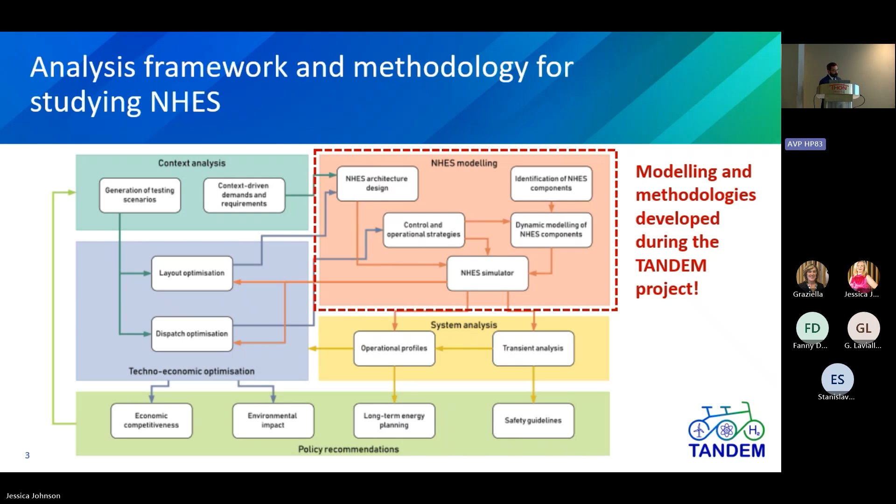This presentation will mainly focus on the modeling and methodologies that we have developed during the TANDEM project. So at the end of a project, it's a little bit sad because it's finished, 3 years of intense work, but I think that there is one very important question that we have to answer. And the question is, why is the world a better place after the TANDEM project, and specifically after the work package 2 activities? At the end of the day, we have found 3 answers to this question, and I will tackle the first one, and then there will be Guido and Torsten to tackle the second and the third one.

At the end of the day, we were able to develop an open source Modelica library. We have already mentioned this in Claire's presentation. So we have developed a modeling tool that is open source, so everybody can use and everybody can exploit the work that we have done. This library was aimed at simulating the more technical aspects of the behavior of power plants, of the different systems coupled within the nuclear hybrid energy system, obviously including the nuclear part. TANDEM was mainly focusing on light water SMRs, but not only, and also the other components that represent our integration, meaning hydrogen plant, desalination, thermal storage.

The second big outcome that we have achieved is that not only have we developed the bricks, the building blocks for developing a possible simulator for the hybrid energy system, but we have developed 2 hybrid system simulators. One for the first case, the district heating case, and the second one for the energy hub case, that have been developed for the techno-economic analysis and the safety analysis. And in the next presentation, you will see the application of these 2 simulators.

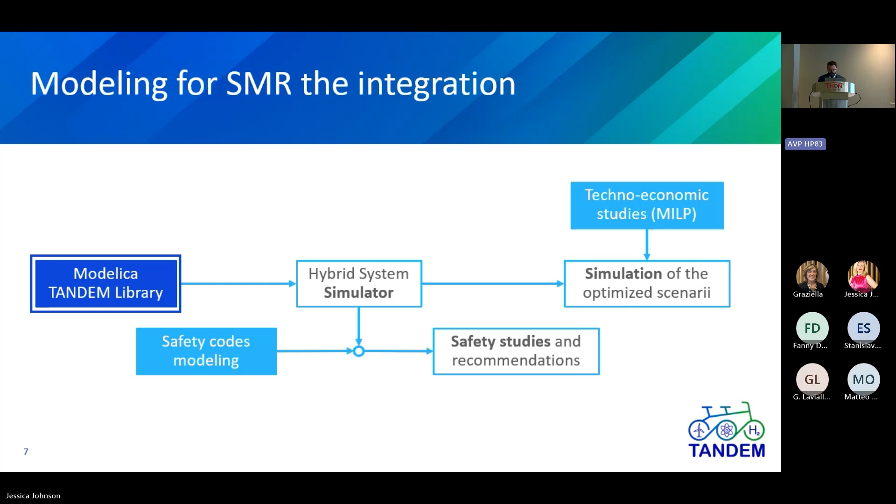The first step that we tackled for the TANDEM library was starting from the functional requirements that are asked for this kind of library. So we asked ourselves which are the key features that this library has to have, the must-haves for our modeling tool. And here you can see that we would like to have something that is able to have a dynamic response of our systems. One of the biggest challenges of a hybrid energy system is to coordinate the different inputs and outputs in terms of energy flows, so both electricity and thermal flows, in order to be able to exploit the best from our system.

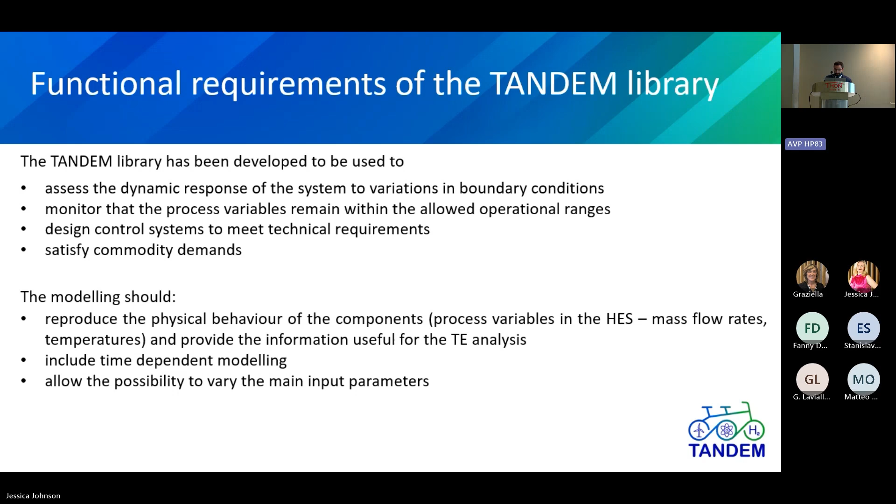Obviously, for a more technical part, we need to keep trace of the process variable during this variation. So at the end of the day, we come up with the Modelica library. Another important feature that we would like to keep is that a lot of partners in the TANDEM consortium had experience in Modelica. So we should not reinvent the wheel, but we decided to reuse some legacy libraries that have been already developed by the partners and share the library in a more general framework, the Modelica TANDEM library.

And on the other end, try to develop connectors that make it possible to use both the best from one library and the best of the other library. Here you can see the models that have been developed for the library. You can see the more nuclear part with the NSSS and the balance of plant, electrical grid, district heating, storage, renewable, desalination, and hydrogen production.

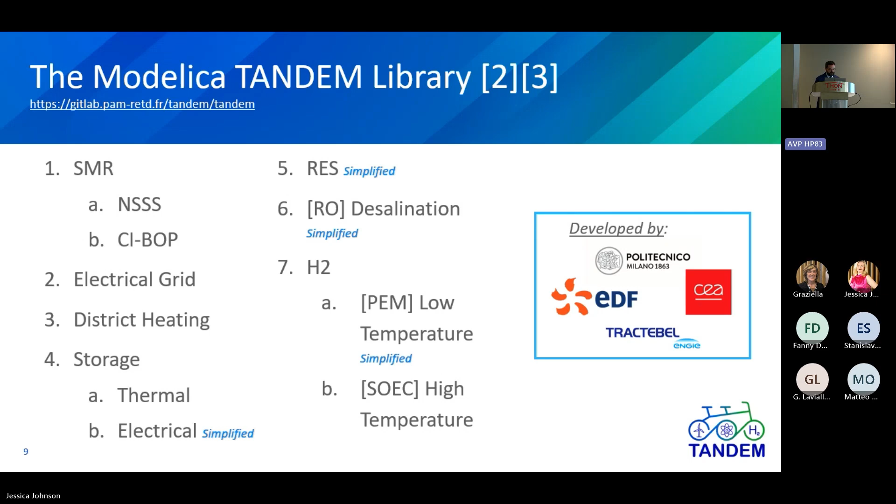Always in the first phase, we have decided which are the components for which we need a very detailed configuration. And here you can understand that the simplified keyword means that since there are some components that require just an electrical connection, we decided to simplify the modeling. And these are the supporting libraries, so the legacy libraries, and you can see that they are coming also from different

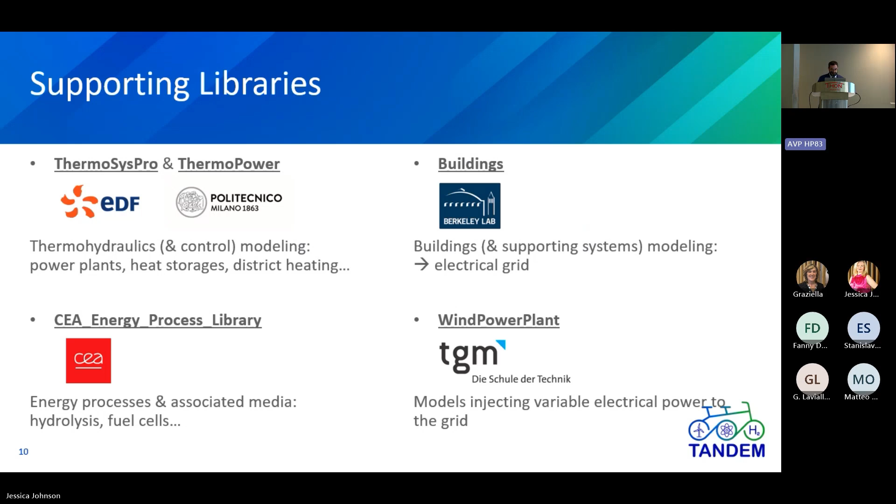partners. The other important message that we want to share with you is our general approach that we employed for the library. As I mentioned before, this is a general rule in modeling: try not to complicate the model of the components much more than it's needed. So that's why for the only electrically coupled components, we decided to keep simplified modeling strategies. As I mentioned before, different Modelica libraries have been used for the modeling.

And so we have developed ad hoc adapters in order to be able to, for example, take the model of the NSSS from one library and then couple it with the balance of plant from another library. And then we have considered mainly two coupling approaches: one thermal coupling, and the second one the fluid coupling, in which we can decide the degree, simplified or a more refined coupling between the two subsystems. Obviously, these apply for the strategy in which we decide to couple components coming from two different libraries.

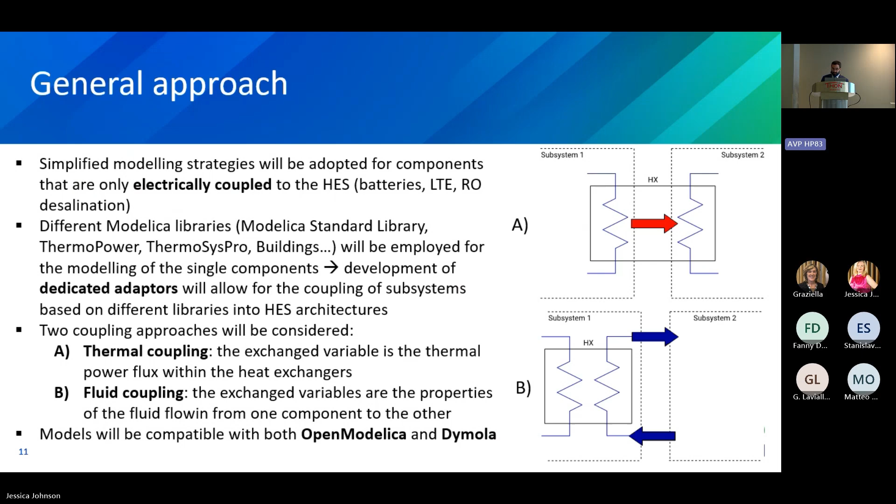Here you can see in a very brief way an example of the module. In this case, we take the data from the E-SMR, European SMR from the ELSMOR project, and we develop two models for the NSSS and three models for the balance of plant. This was mainly driven by the fact that in some cases you need different degrees in your model of the balance of plant. So one model is the so-called simplified one. The other one is more dedicated to transients in specific

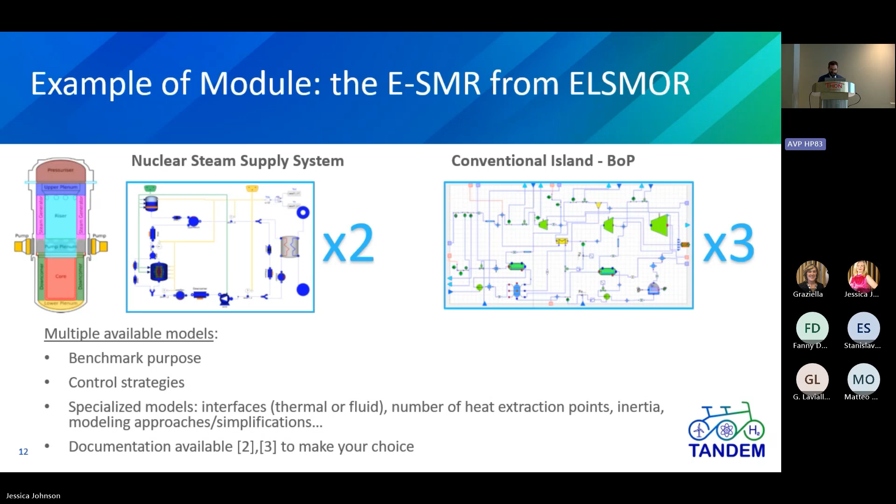situations. So the library is once again open source, freely available in the GitLab repository. You can find the link in the TANDEM website. As mentioned before, how can we use this library? You can develop your customizable simulator. You can assemble your own simulator with the available bricks. You can also develop your own bricks depending on the needs.

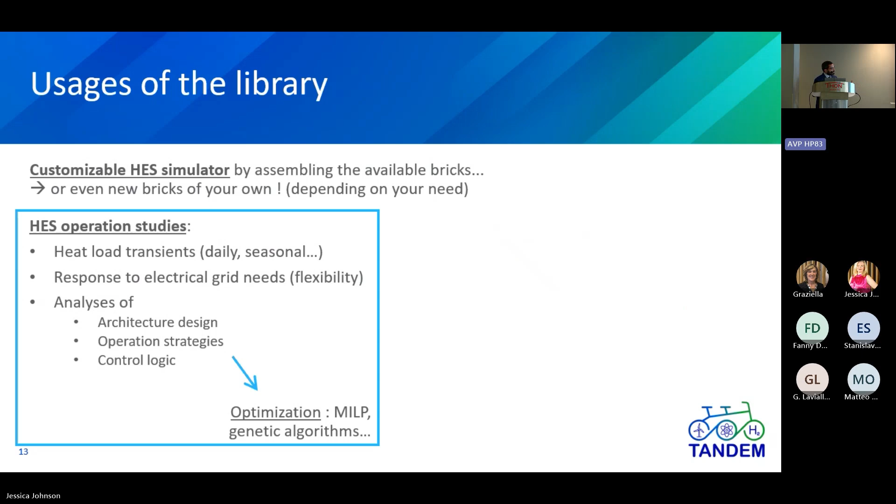And the two main applications: the first is to study the operational transients, like heat load transients. We want to study how the system responds to the daily or even the seasonal variation of the heat, the response to the electrical needs, and so on and so forth. And this is the application more related to the techno-economic analysis.

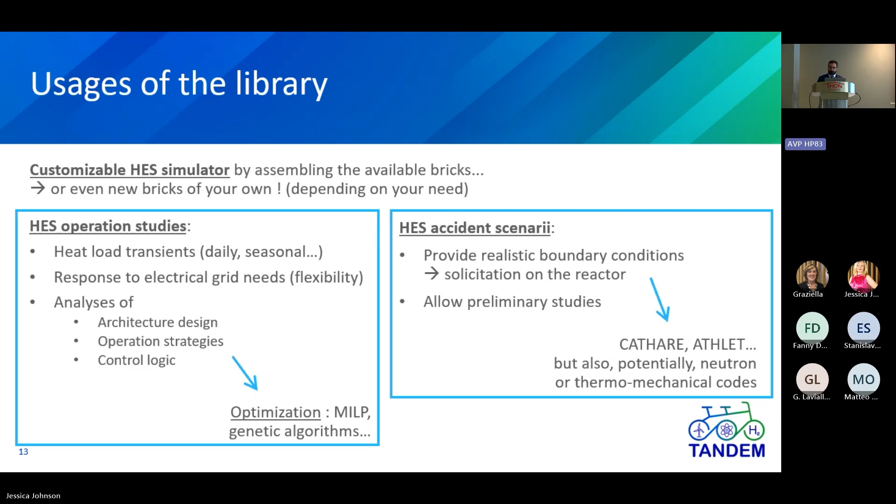The second one is the application for severe accidents. So try to really understand which is the difference, if any, the additional concern that we are introducing when the balance of plant is used also for cogeneration applications or in general polygeneration applications. So this is the very big first achievement that we have developed, the open source Modelica library. Now I give the floor to Guido for the second big outcome, which is the development of the two hybrid system simulators.

Yes, thank you. So with this slide, I just wanted to show a practical application of the library, which is the modeling of the two case studies that were introduced by Claire this morning. The first is the district heating case, for which we considered the district heating network in the Helsinki metropolitan area as a reference, which as of today is driven mainly by fossil fuels, and as part of the decarbonization strategies investigated by TANDEM, we considered the potential integration of a light water-cooled SMR to this grid.

And the second architecture is the one of the energy hub case, where we are talking mostly about an industrial district, where we have several electrical and thermal power sources that are strongly interconnected with each other and with different industrial processes, like hydrogen production, desalination, and so on, to provide commodities to different end user segments.

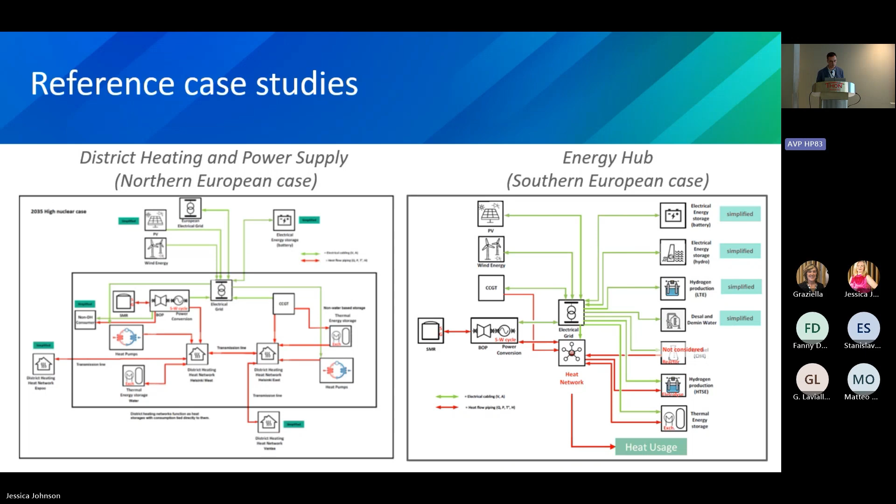Before diving into the modeling activities, we carried out an intermediate step, let's say, a preliminary investigation, to translate this more conceptual architecture into a more detailed plant layout, which you can see on the right-hand side of the slide. In particular, we tried to build and provide a representation of this district heating network in a more detailed manner, considering also heat exchangers, transmission lines, valving systems, pumps, and so on, to be able to translate it into the Modelica language and account for the dynamics and the phenomena occurring in the single components of this district heating network.

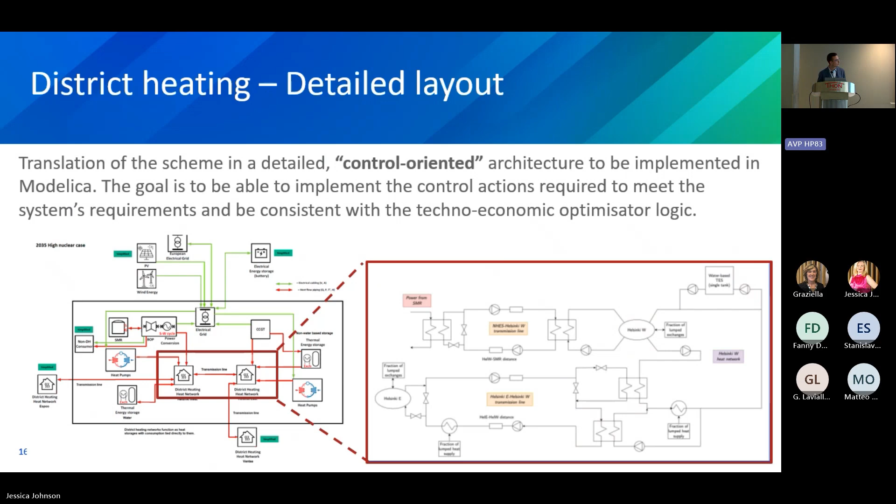So if we look at the simulator, this is the simulator resulting in the Modelica language. I think that also from this picture, you can really appreciate the advantages of using an object-oriented modeling language like Modelica, since it was possible to take the single bricks in the library and assemble them with each other in a quite flexible way to build this more complex and comprehensive energy system architecture. In particular, you can see the bricks for the nuclear steam supply system, meaning the primary side of the nuclear reactor, the steam cycle, and also the district heating network, which is based on the architecture that I've been showing before.

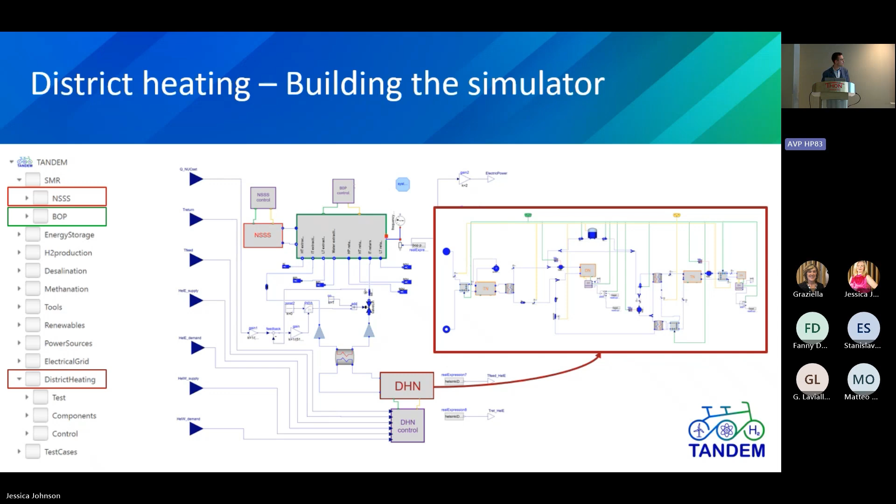Here I reported just an illustrative transient simulation to showcase how a simulator like this one can be used. Essentially, we provided several set points in terms of heat demands and temperature requirements for the Helsinki network. With the simulator, we were able to investigate how the power flows are allocated within the system, for instance, from the nuclear power plants to the network, or from other heat sources, or the exchanges with other district heating networks. And of course, we are able to account also for the dynamics, inertial effects, fluid travel time and so on.

Moreover, we can investigate different control strategies. In this specific example, we considered temperature control strategies, meaning that, as you can see from the second row, we are able to control the temperature levels in the district heating network according to predefined requirements, which depend on outdoor conditions. And last but not least, we are also able to track more system-specific variables, like the power produced by the nuclear reactor and how it is affected by a variable heat extraction for cogeneration purposes.

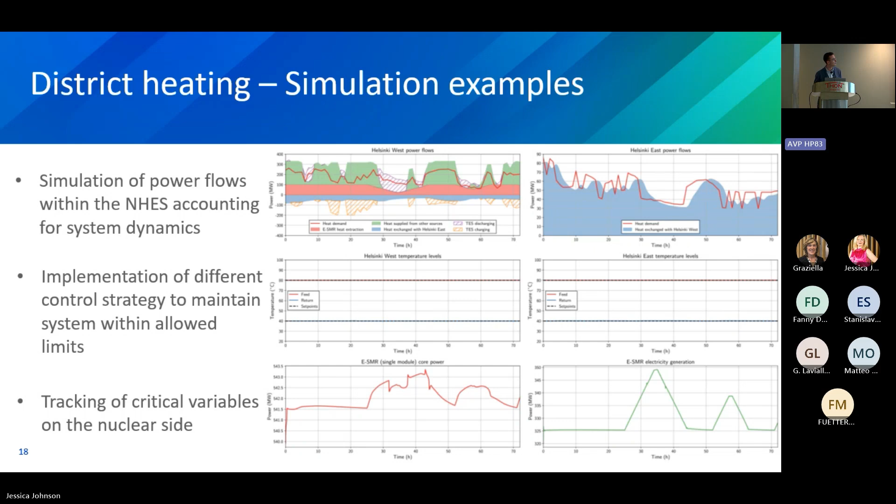If we look at the second architecture, we did a similar approach to translate the conceptual scheme into a more detailed architecture. In this case, we focused only on some specific components, considering just the SMR as a power source operated in cogeneration mode, and as an industrial process, the hydrogen production via high temperature steam electrolysis. As you can see, we have also other power sources whose operation is coordinated together with the SMR to meet both an industrial load and the energy requirements of the hydrogen production plant.

For this specific case study, we decided to investigate two different architectures. A coupled architecture, in which the steam cycle is directly connected to the hydrogen production plant via an intermediate oil loop, meaning that any variation in the operational state of the hydrogen production plant will directly affect the steam cycle operation, while on the other hand, in the decoupled architecture, we have a thermal energy storage system, which is essentially separating the operation of the steam cycle from the one of the hydrogen production plant.

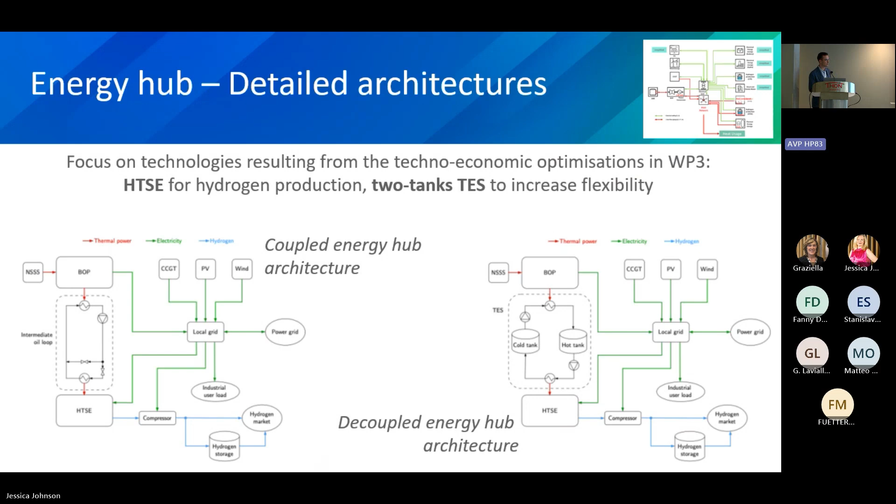Now, if we look at the simulator, we were able to build it adopting a similar approach as mentioned before, meaning that we can combine the bricks available in the TANDEM library through a plug-and-play approach to build a simulator. We have essentially the same nuclear power plant model that I've been showing before, but this time we coupled it to the thermal energy storage system, in this case just the decoupled architecture as an example, and to the hydrogen production plant.

And here you can also see the feature that Stefano was describing, which is related to the use of different libraries within the same dynamic simulator. For instance, we coupled the thermal energy storage system, which is based on the ThermoPower library, with the high temperature steam electrolysis module, which is based on different libraries since it was built by different partners of TANDEM, and we were able to couple them through dedicated adapters.

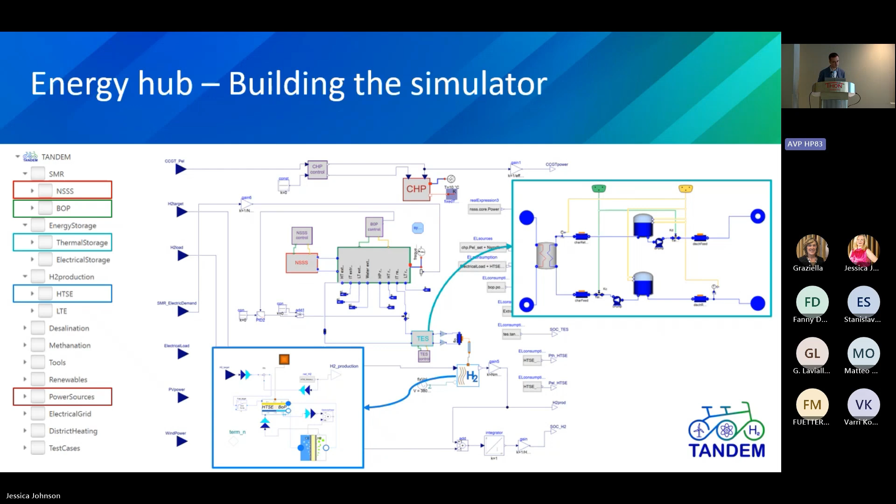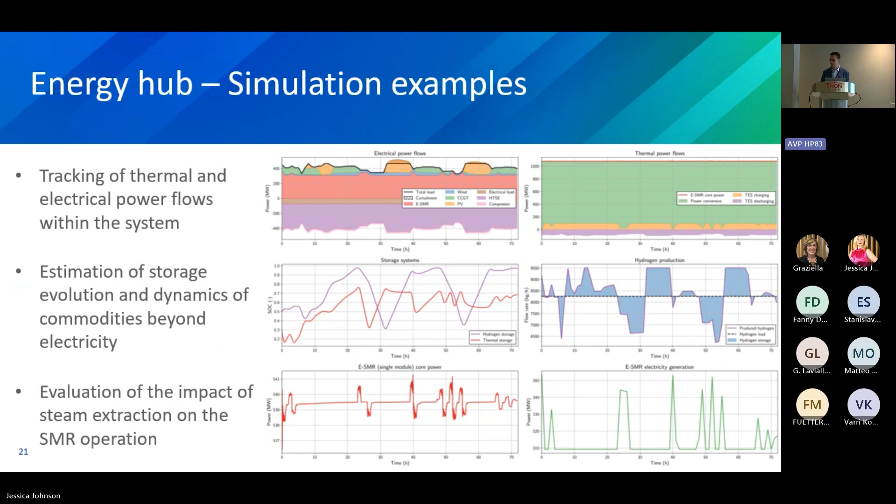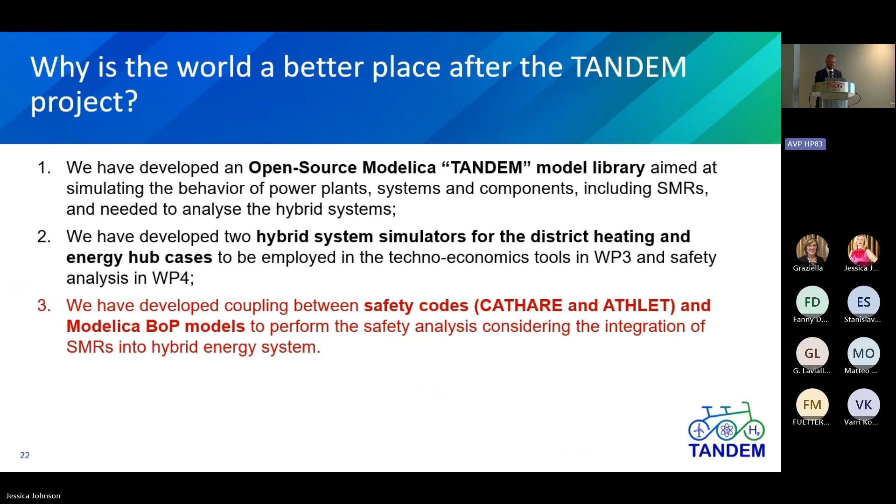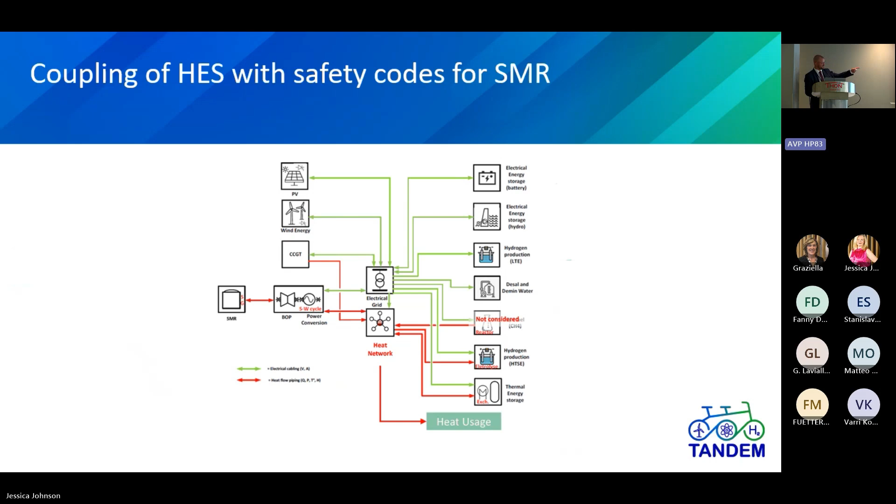Thank you, Guido. So coming to the third point, we have developed a coupling scheme between the safety codes, that means Cathare and Athlet on the one hand, and the Modelica BOP models on the other hand. So that means we don't consider the whole system, but just, let's say, the BOP for the interface, but I come to that later. What we have here is a hybrid energy system, and we have on the left side the SMR and the BOP for the power conversion.

And that's what was just described before. And the main interface module is the BOP. That means the simulation of the turbine generator unit and all the I&C systems, what is needed coming from the hybrid energy system, and as a boundary condition for the SMR. So that means we built an interface between the BOP and the reactor, which was in that system a Modelica based system, and coming to the safety system.

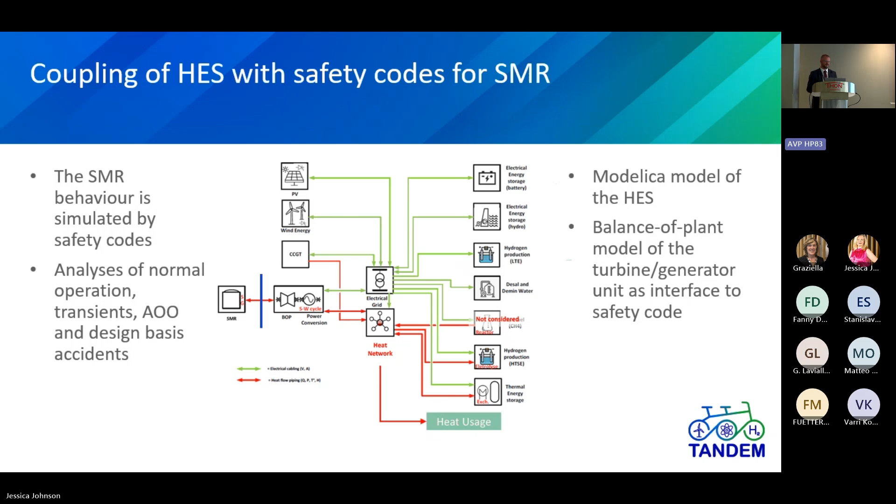That means the SMR itself will be simulated by safety codes, which are mechanistic codes and more detailed than the Modelica model. And therefore we find some scenarios like normal operation, AOOs, that means abnormal operation, and design-basis accidents, but Walter and Paolo will talk about that in the next presentation. It is not an easy topic to find scenarios suitable for cogeneration. But what do we really want to simulate?

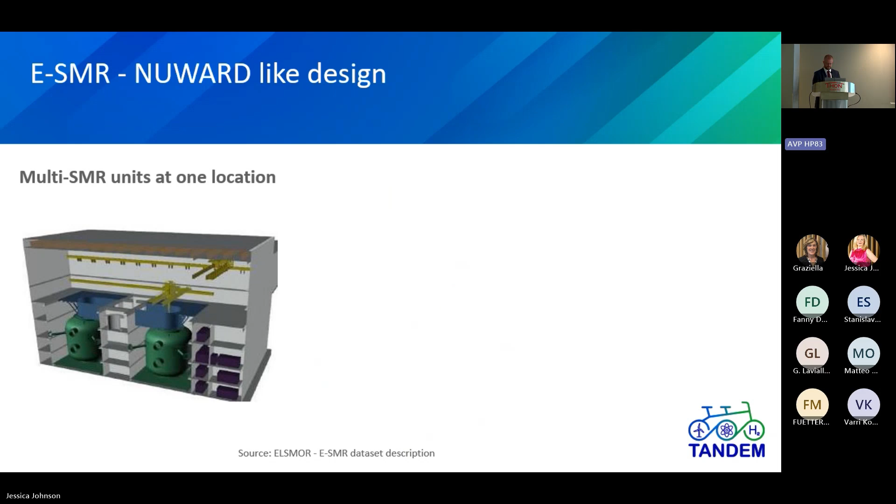It is assumed that multiple SMR units are to be built at one location. That means we have 5 to 6 small modular reactors, not one big one, but for the simulation or the coupling and safety analysis, we choose only one single unit because it's the first approach, and to make sure that there are no interconnections between the reactors, just one is taken here. And how it looks can be seen on the right side.

It's the E-SMR data set description, which was built up in ELSMOR, and it has a total thermal power of 540 megawatts and electric power of 167 maximum. But that can, of course, be split for cogeneration purposes. Compared to that, an EPR, as it was built in Flamanville or in Finland, has 4,300 megawatts thermal and 1,600 megawatts electric. That means more or less 8 small units are needed to generate the same electricity as one big one. But I think we know the advantages and disadvantages between small modular reactors and large light water reactors.

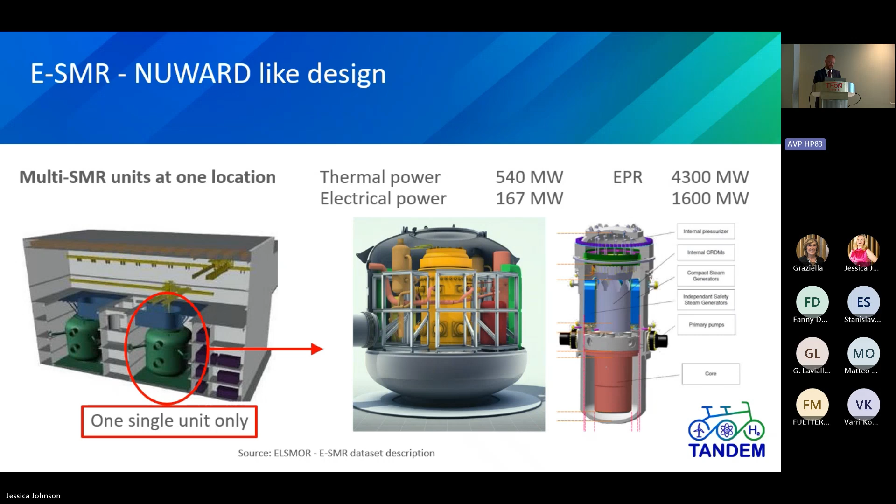Yeah, and what are safety codes? As I said before, they are used to assess the safety of reactors, in this case light water reactors. They have been used since it became possible to use computer codes for the evaluation of reactors, and they're used by utilities, vendors, TSOs, regulators and so on, to judge what happens in a reactor in incidents and transients, or accidents like DBAs.

And what we use in the frame of TANDEM was, on the one hand, AC2 Athlet, which is developed by GRS and part of the code package AC2. It's the thermal hydraulic part of it, dealing with all scenarios up to DBA. And the comparable code is Cathare, which is used by CEA and some other French companies. So it's a French package dealing with thermal hydraulics. They both are more or less state-of-the-art safety codes, which means they are validated and have a certain level of development so that they are trustable to be used for safety analysis.

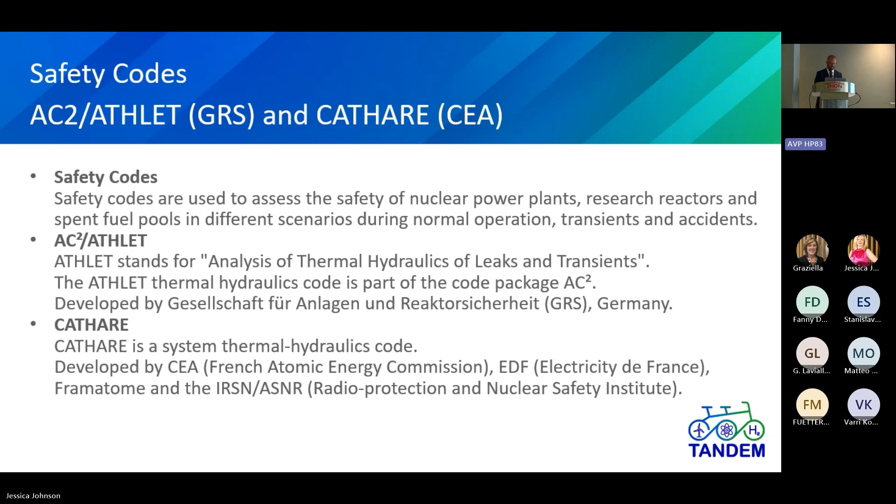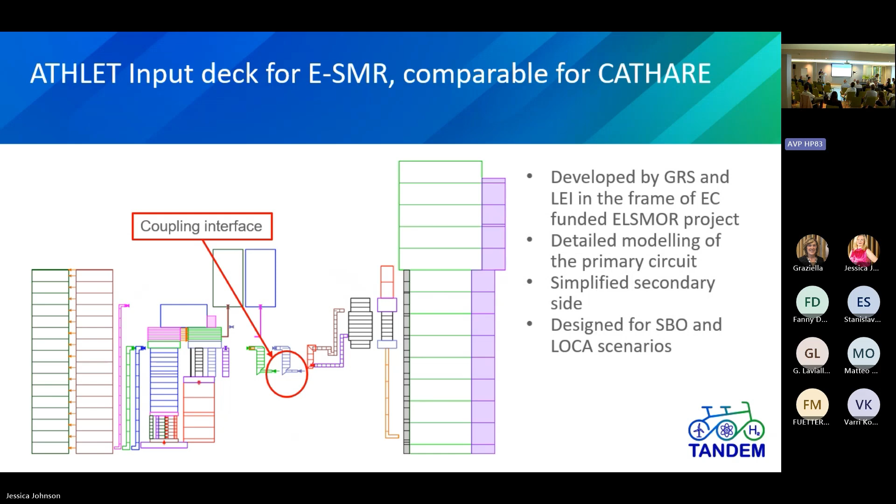And how can it be done technically? Just as an example for the ATHLET technique, but it's comparable to what was done by CEA for CATHARE and Modelica. In general, there's a Python interface around it, which does the control of everything, and there are a lot of so-called FMUs, which deal, for example, with the control of the primary system, the BOP model, and all models which are needed and coming from the hybrid energy system. And on the other side, you have the safety code as a unit that interacts with the hybrid energy system.

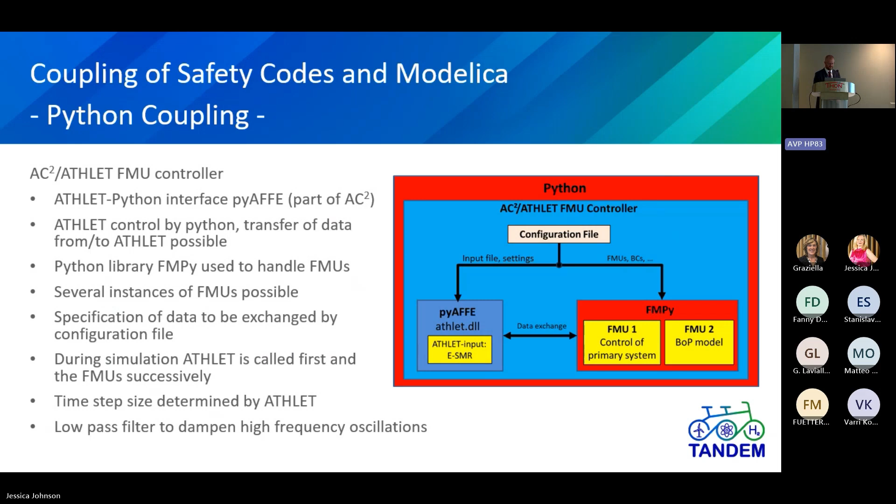And how can that be done? Of course by moving the control rods, spray and heaters, the volume control. So this is classical light water reactor technique. There's nothing special for the SMR.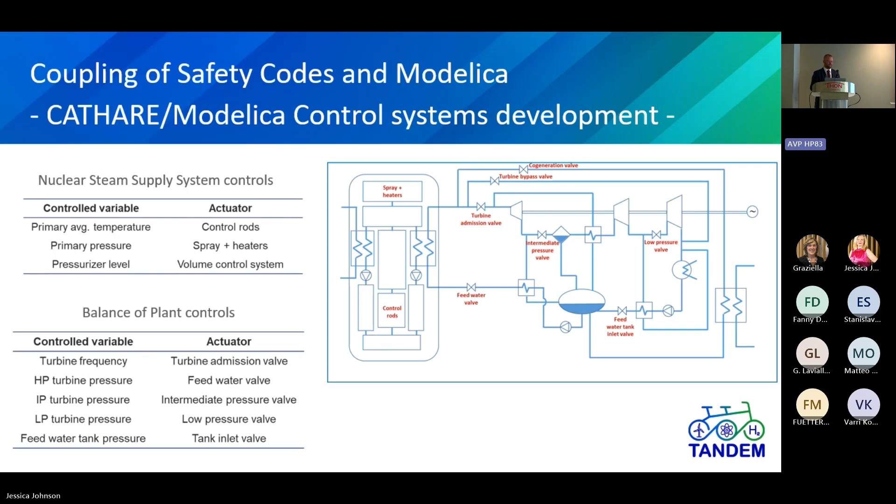And what is controlled in the BOP, or needs to be controlled, is the turbine frequency, the turbine pressure, high, intermediate, and low level, and the feed water tank pressure, and that can be done by the turbine admission valve, feed water valve, intermediate pressure valve, low pressure valve, and tank valve. That means you have to adjust your valves, and these are also some actors or points which need to be adjusted to get stable conditions for that coupled simulation. Oops, wrong direction.

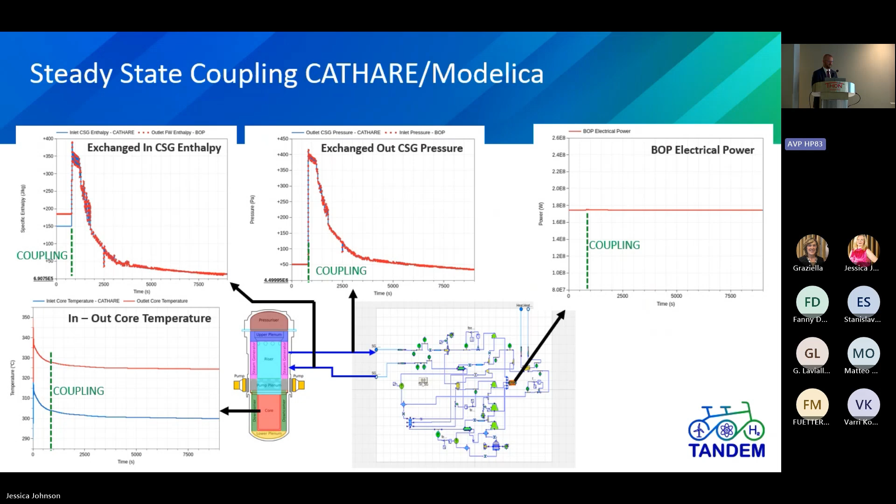Some examples to show that for the CATHARE/Modelica level the system runs plausibly, and that it can be used for the following safety analysis, and Paolo will show some results about that later. So I don't talk too much about that.

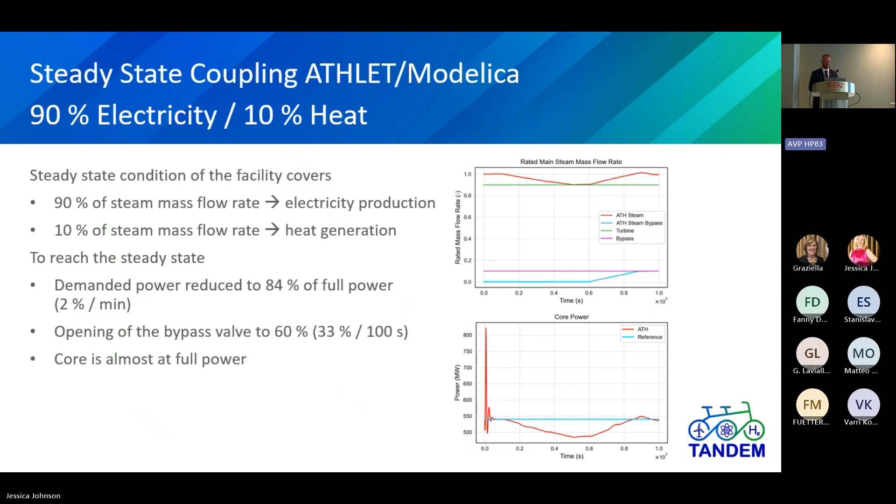And the same case for ATHLET/Modelica, just to show that for combined usage, that means 90% electricity and 10% heat, which is our cogeneration case, the system is running and shows plausible results, which makes us able to trust what we modeled, and we can use it for safety analysis.

Finally, to conclude, the product of work package 2, what Stefano and Guido also presented before, is that we have a Modelica library with components for the SMR, for the heat storage, for renewables as well, electrolyzers and so on. And based on that, a customizable simulator was built and can be used for the district heating and energy hub cases. Due to the TANDEM activities, we enable techno-economic studies on the nuclear hybrid energy system, also with the possibility for optimization.

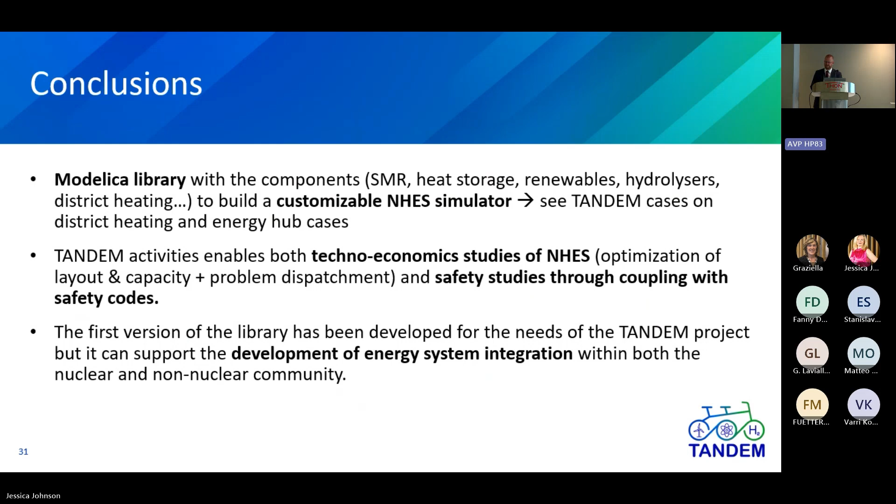And what I just showed before, also to do safety studies with a coupled system, and not only standalone safety code application. And finally, the first version of the library was developed for the needs of the TANDEM project, but it can also support further development of energy system integration with nuclear and non-nuclear applications, maybe even right now, but also in a follow-up project, to enlarge the range of applicability of that system. With that, I conclude our presentation, and we're open for questions.